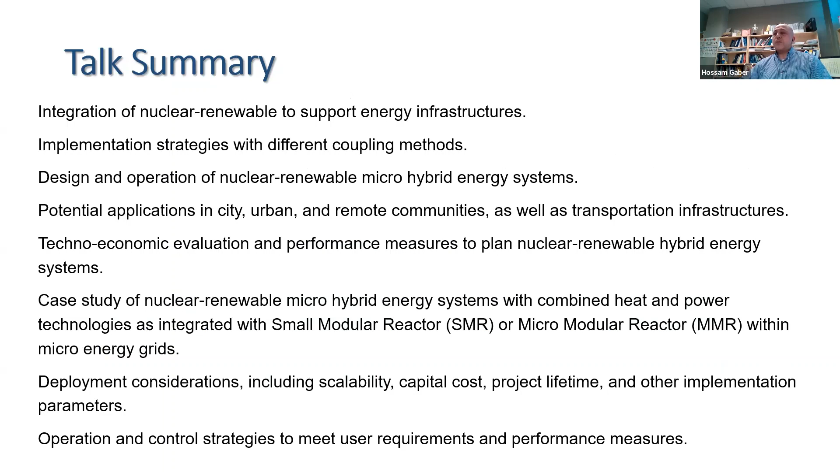At first, before we talk about nuclear renewable, I started this work actually in 2003 around Japan, where I was a professor there at Okayama University, in 2004 actually. At that time, I started looking into what is the problem - why do we need hybrid energy, and why don't we just use one source like a nuclear power plant and that's it?

So what we did at that time is I modeled this area and meshed it with GIS, geographical information system, and captured information from each cell, like number of vehicles, number of persons, number of plants, buildings, cars, and then emissions and energy, and we tried to balance those to be able to calculate what we really need and what is the best way to move forward.

If our demand is increasing and the resources are limited and not meeting the demand, then definitely we need to find solutions. In Japan at the time, biomass was eventually one of the largest, along with hydropower. We have a lot of rivers, and the hydropower is quite large, but also the biomass, where the buildings are built from wood.

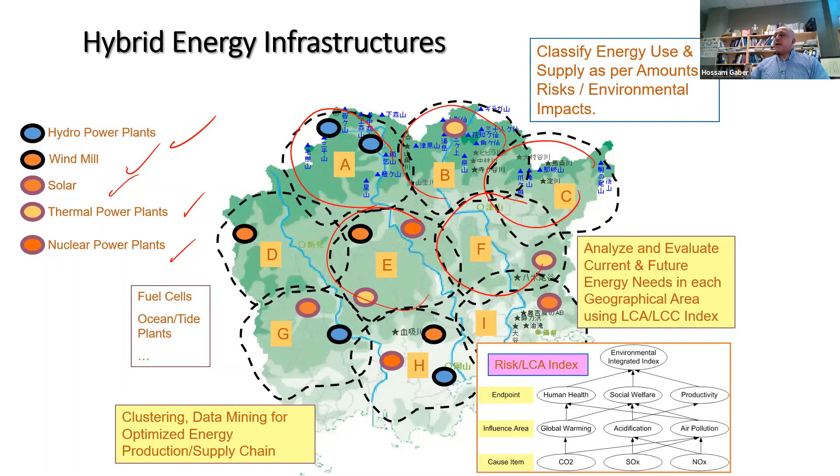So at that time we studied this picture, and I tried to come up with a solution where I try to make it automated. So I generate numbers, thousands, and actually I reached maybe more than 400, 500,000 possible scenarios for different regions. Each scenario means a strategy, different energy technology. Based on that, we try to analyze them and come up with a performance. So that's where we reach the first stage.

Now, the energy modeling part, which is an abstract way, it's not necessarily just thermal or electric or fuel gas, but it's also work, like the thermodynamic law, something that you need to do something, move something, like maybe a motor, engine, generator, turbine, and so on. So you need some usage out of that, which is the work at the end. In addition, we have some other things like light and some other mixture between them.

So at that time, when I was doing that analysis to come up with what is best to move forward, I needed to build these model libraries. The model libraries will allow us to first understand in an abstract manner what are the possible conversions, even some of the things that might not be available.

Like for instance, at that time in 2003 and 2004, there was no clear cut about like fuel cell in terms of advanced technologies, fuel cell, gas-power, or power-gas conversions, and so on. So that's where I started looking into applications. Like now, we don't have a hydrogen barbecue, for instance, or hydrogen boiler, but we do have hydrogen fuel cell. So accordingly, there are things which we can think about.

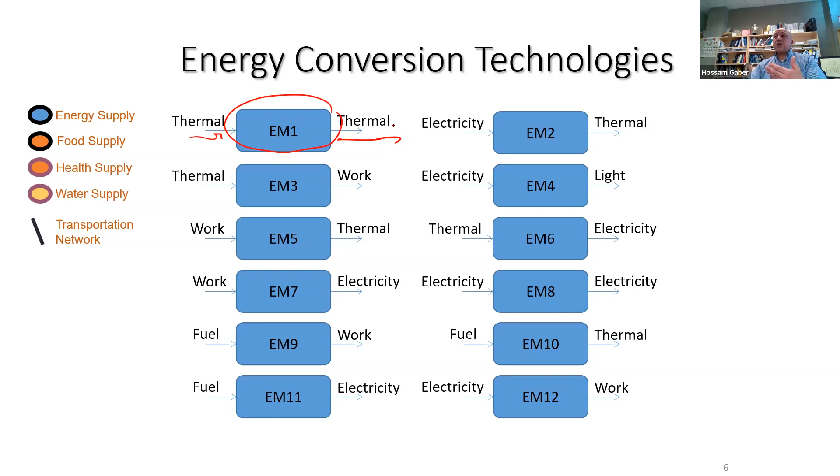Based on those, I embedded that into the model so that I was actually able to generate and evaluate the scenarios to achieve the best possible combinations. At that time, I thought about something very interesting, and I believe I was one of the first people to think about smart energy grids at that time in 2003 and 4.

And that's where I found that it is possible that, for example, if we have a building like in your campus, you have a natural gas pipeline coming in, and you have thermal pipelines and thermal storage and so on. And you have the power, electricity, and you might have network, and some other cables coming to the building. At that time, I thought, what about we think about this cloud, like internet energy cloud, Internet of Energy, or electric cloud, which means I convert everything to electricity and just move electricity across places.

So in this case, instead of extending natural gas pipelines, I just extend power cables. And if I want to get any natural gas or hydrogen, I can generate hydrogen by electrolyzer and fuel cell, for instance. That's where I started looking into different extremes and evaluating them with different scenarios.

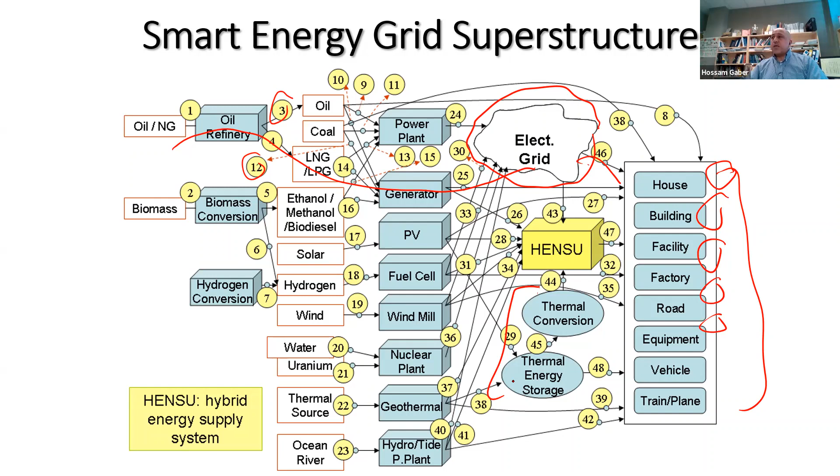After that, when I went to the big picture, I had to go down to the end user, like a building, a campus, a factory, a farm. Based on that, I started looking into the lowest possible, smallest level, which is a micro energy grid.

So we have two-way communication, which is the transfer from the infrastructure, like a water network. We can get water into the building, or we can get water from the building if it is treated water, processed water, or stored water, and so on. Same for electricity, gas, and thermal.

So I included at that time some prediction of gas price, electricity price, and weather forecasting for the thermal. Based on that, we were able to say what the best possible scenarios are between microgrid 1, micro energy grid 1, micro energy grid 2, and the transmission.

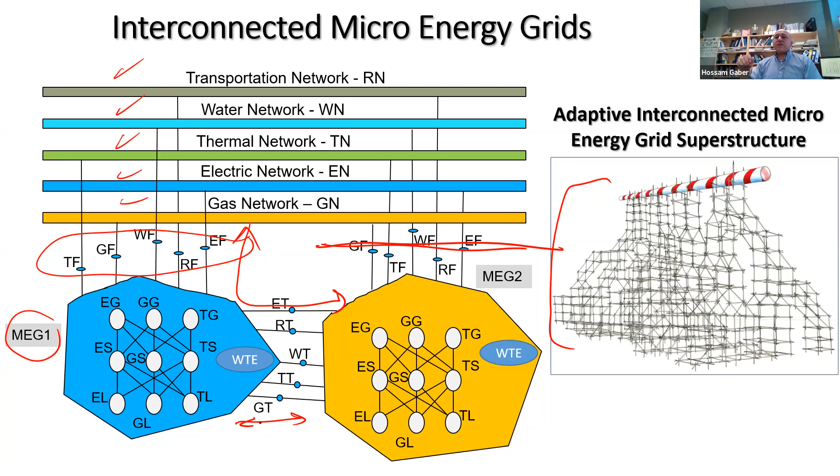One point I want to highlight: the definition of micro energy grid. As we know, people thinking about microgrids always think about AC-DC lines—if we have an AC line and a DC line, that's usually called a microgrid. But in my case, I was talking about a micro energy grid, where I'm talking about hydrogen flow, thermal flow, natural gas flow, water flow, and transportation.

Here, I also included things like waste-to-energy. We get the waste, with gasification and pyrolysis we can generate high-value gas or clean diesel or clean oil, also for industry and transportation. But also we can generate electricity out of the waste. Based on that, we are able to link them with the comprehensive picture.

Now, as we know, this is a comprehensive model that can be implemented in different places. If we implement this in a northern area, it might be different than if we implement it in a southern area where we have more thermal needs. That is where the variations, parameters, and configuration can be adjusted. Same for availability—if we do have natural gas, we include it based on the price prediction and availability.

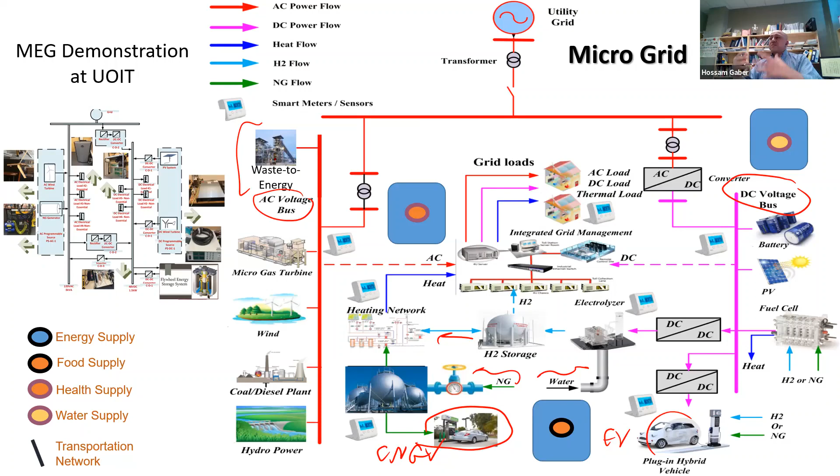And in our house, the heating couldn't work because of the electricity outage. So it was a sort of disaster, but that's where a hybrid system can give us resilient energy systems. The combination between them will lead to the best possible microgrid or energy scenario.

Now, what do we mean by best? So I started quantifying, analyzing, and modeling what we mean by the best hybrid energy system. I'm preparing this before discussing nuclear renewable, because this is very important—when we talk about nuclear renewable, we will talk about the best scenario. So we modeled sociocultural, economical, environmental, reliability, and technical parameters, which gives a comprehensive view.

If you have an energy system and you'd like to say it is good or bad, how good or how bad, you'd like to give it an overall percentage evaluated based on all of those factors, not just cost, reliability, or quality. So that's where I created those parameters to be able to evaluate them.

And I linked the parameters based on the microgrid components, like PV, SMR, wind, generator, and so on. Each of these will have a set of variables—for PV, it's things like height, weight, dimension, capacity, power rate, and so on.

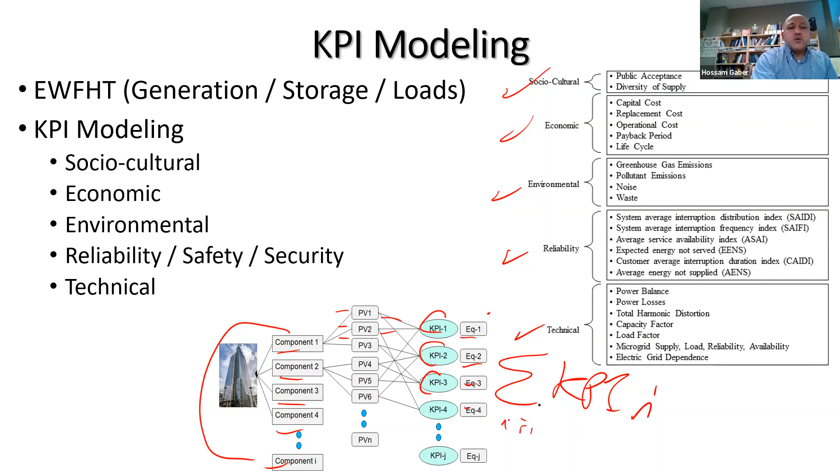Based on that, we group them into KPIs, and overall we put weight on those KPIs. The summation of all KPIs, i, from i equals 1 up to N, for example, allows us to get the overall value of the KPIs.

In addition, we also quantify the risk. The risk—although any industry or energy system is always very clear about this—is the likelihood times the magnitude of consequence, L times C. However, what we're saying is the probability of failure also has to be related to that value.

If I tell you I'm going to install a hybrid micro energy system with SMR, wind, and solar, it's not enough to say how much it will cost and how long it will take. I have to say it will be reliable, that it will not have interruptions for a certain period, which is the probability of failure on demand, related to probabilistic approaches.

That's where we developed this Bayesian belief network to evaluate the cost of losing electricity for one hour. We were able to integrate that, and based on the cost of losing electricity for one hour, that gets reflected in cogeneration, resiliency, and the value of nuclear renewable.

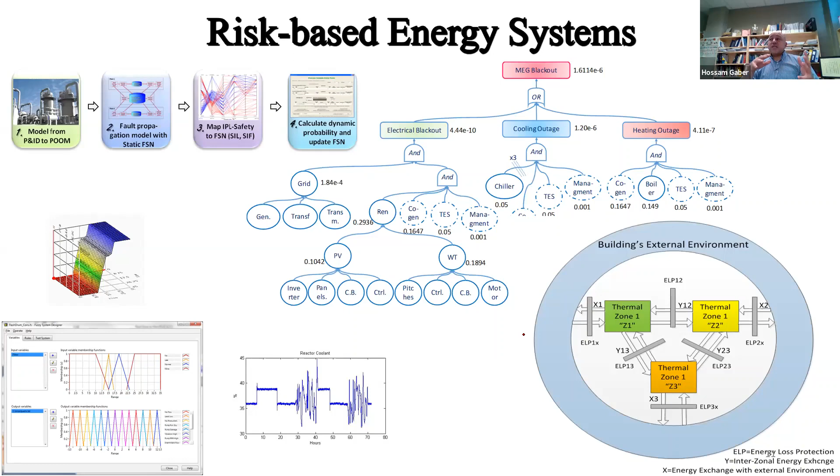That's what led us to IPL, independent protection layers, and PFD, probability of failure on demand. This is a detailed concept, but essentially, if you need resilient energy systems, the probability of failure should be very low, which means you need to add more additional protection layers.

In terms of safety, a protection layer is an alarm, shutdown system, and maybe redundancy. But in terms of resiliency, the protection layer, or resiliency layer, will be cogeneration and storage. So if you have more storage, even if you have a power outage, you can use the storage for a certain time.

So I try to link the resiliency with the risk, and they created those concepts of IPL and the independent resiliency layers, and I captured that, and that was also published and analyzed.

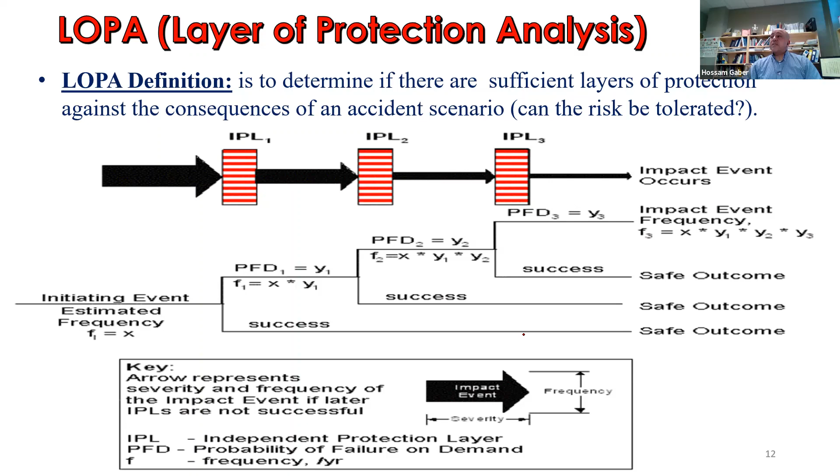Now, based on that, we are able to talk about how to introduce nuclear renewable as a motivation here. So we would like to introduce nuclear for a number of reasons.

It is sustained, sustainable, clean, and reliable. Especially SMR - small modular reactor, or MMR, micro modular reactor - they are expected to be sustained and stable. There's no additional burden of operation, changing fuel, and so on, and no generated local waste in the region.

However, there is some waste that could be generated for maintenance and inspection and so on. However, it is minimum. Also, because it is a stable energy source, it can cover the base load. But for the availability of local resources and RES, which is renewable energy sources, we are able to integrate and get the best out of both.

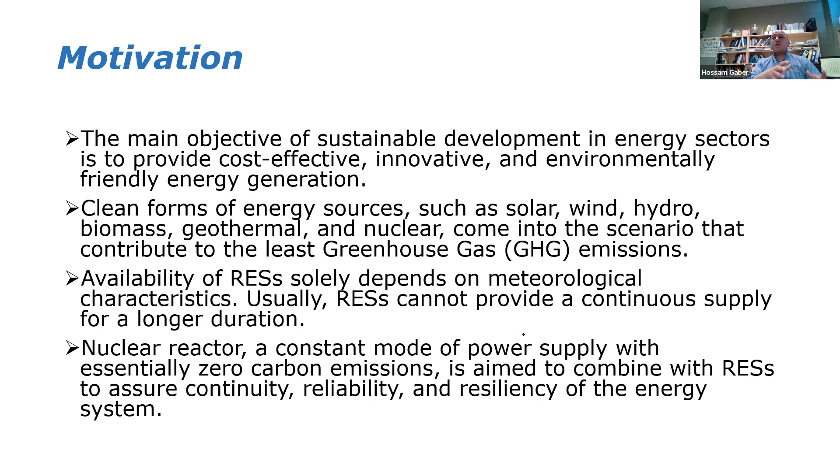The energy can have availability most of the time, and also resiliency. For any reason, if the SMR is not available due to maintenance, inspection, or interruption, or due to licensing - and I will show a couple of examples about marine, where nuclear cannot enter certain territory because of legislation or policy that does not allow nuclear in their territory - then we can use renewable to compensate and balance the energy supply.

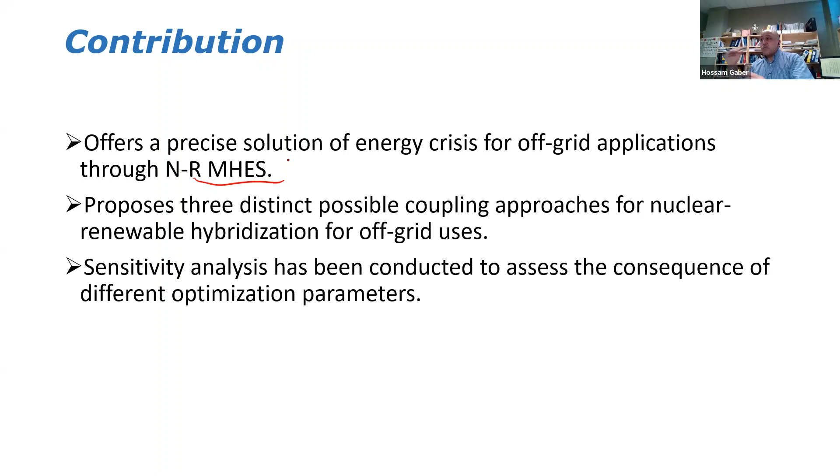So what we are doing here is, number one, nuclear renewable hybrid energy system. Number two, nuclear renewable micro hybrid energy system, which is at the level of a microgrid in small scale. So that's what we have been talking about.

Now, in order to raise this point, we have to ask ourselves a number of questions. Number one is strategy. We understand that the nuclear power plant primarily generates thermal, and based on the thermal, we are actually generating electricity.

That is a generator, turbine generator. So eventually what we get out of the nuclear reactor is thermal, but the thermal can be translated into electricity. So the first thing that comes to mind is the coupling. Now, why we need to study the coupling is because the nature of nuclear renewable might vary.

Like fuel cell has certain input, which is electric, and then from the electric we get hydrogen, and from the hydrogen we get electricity. So it's like power-to-gas-to-power.

Now, for flywheel, for instance, as energy storage, we supply a little bit of electricity, we store it, and then we generate electricity at a certain later time, which is good for a number of reasons - for high inertia, but also as energy storage to balance certain peaks, to shift the peaks or to balance the peaks.

Also, we have a number of typical technologies like PV. So I can use the pointer. Here we have the PV, and here is the hydropower plant. Here is the wind. Here is some load, which we call electric load or thermal load. And here is electric energy storage, like a battery.

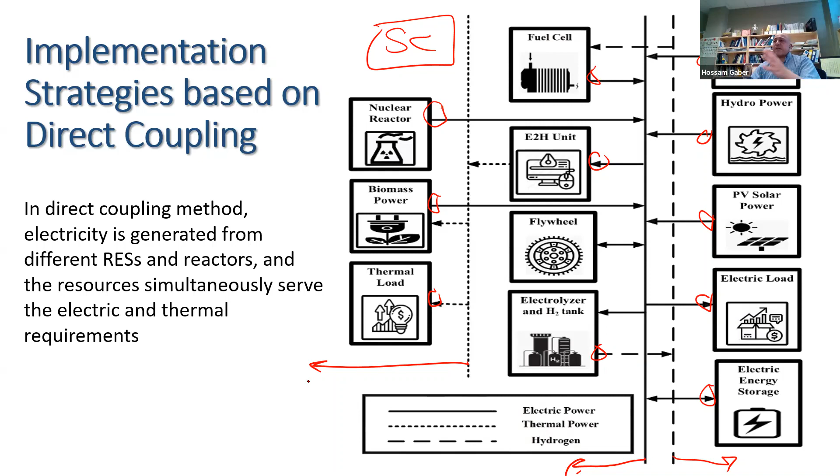So that's what we call direct coupling. We are directly coupling the renewable energy, electricity generated from different resources, and directly linking it to the load.

And the thermal, we can get thermal waste from nuclear in a number of ways, of course, from the condenser area, from the tower, but also we can get it from the reactor itself in a number of ways. So we have those aspects of getting multiple products from the nuclear power.

And again, who decides what is the best? You have to come back to the same KPI. So in order to decide what strategy is good and what is bad, you need to define, first of all, what do you need? Because simply you can actually have here petrochemical processing, so you can have the electricity or thermal to produce petrochemical, electrical, or chemical product.

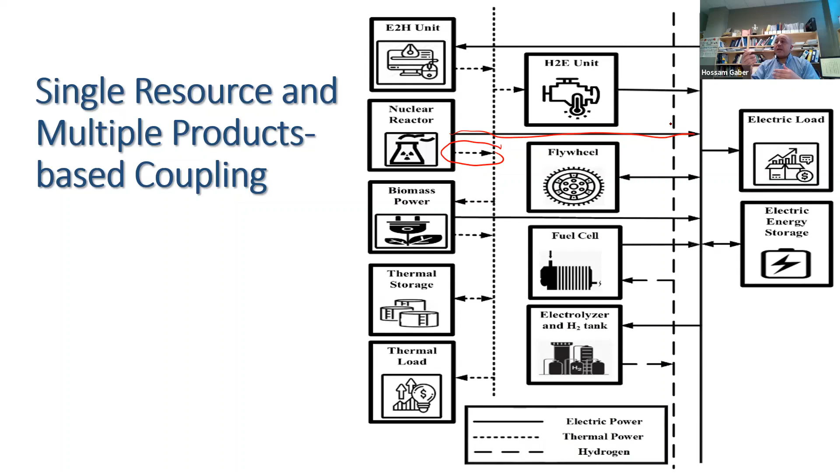Even hydrogen itself, the hydrogen production, you can produce that by thermal or by electricity. As of now, we are producing hydrogen by electricity, but there are some other methods like copper chloride cycles with different cycles where you can actually generate hydrogen by a thermochemical process.

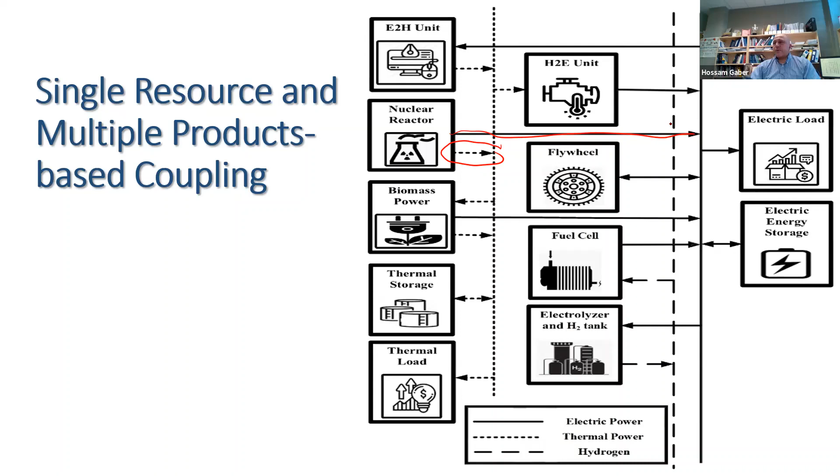Now we can have something more complicated: multiple resources and multiple products. As you see here, we can have different resources coming with multiple products coming out from the nuclear power plant. So we can see here that we are able to have a thermal storage, thermal load on the thermal side with biomass power plant and nuclear reactor thermal, and also E to H, which is electricity to heat.

So that's one side. And then we have also the other side, which is H to E, where you can get the thermal and generate electricity here, and that goes to the line here, to the electric load, and also can go to the electric storage.

So imagine that you are able to manage all this picture, in and out, based on pricing—price of electricity, price of gas, maybe the levelized cost of all those resources—but also the weather prediction and the load profile of thermal and electric load. So we are able to optimize this picture based on our needs and our criteria, I would say.

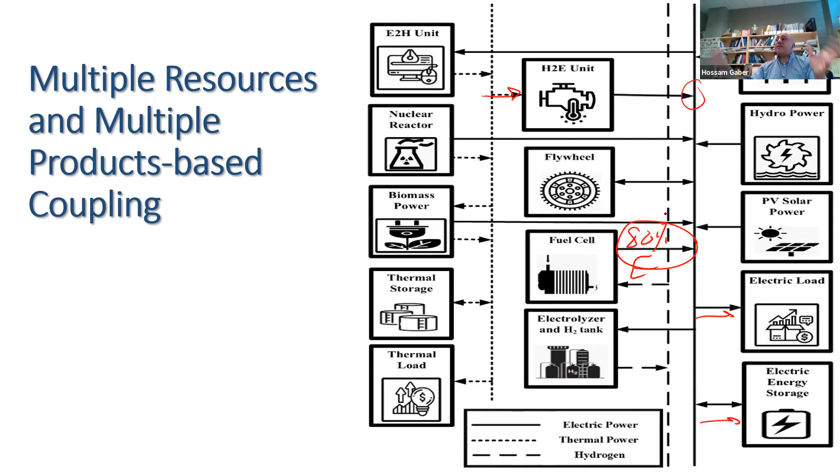Of course, there are other parameters, like regulations. For example, I could say I need 80% of electricity to be generated from the fuel cell. This is a parameter we can actually dictate, specifying what percentage of electricity comes from each source. Maybe 5% from E to H or H to E, and 10% from SMR, and so on. Each generation capacity can be parameterized and configured based on the optimization criteria and the control structure that executes it.

Now how to do that? It's a small picture, but I'll explain simply. We'd first like to see the resources and load availability, get the profile, and then determine whether we have adequacy to sustain the load, or a need to start utilizing any of these other sources.

So imagine we are putting parameters here, this is A, this is B, and so on. Each of these is parameterized and controlled. Parameterized means either on or off, yes or no, and number two is how much amount, with respect to time.

We can apply this algorithm with a 1 hour ahead prediction, or a 1 day ahead prediction, with optimization to tell us the size of the PV, the size of the electric storage, the size of the thermal load, the size of the flywheel, and the size and capacity of each unit, like E to H, H to E, and the fuel cell.

If we are also considering SMR as one of the parameterized elements, we can configure what type of SMR is needed and its size. So we can define the number of parameters to consider, along with the control strategy.

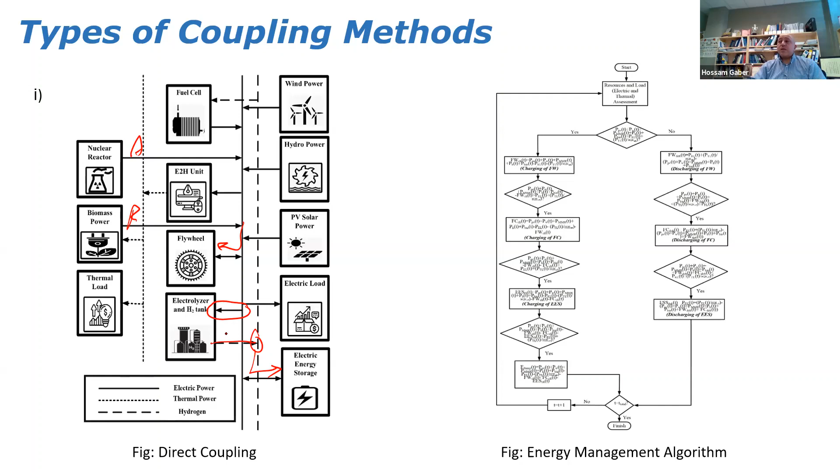Similarly, when we have a single source but multiple products, like thermal, electricity, and hydrogen, we can combine the picture. This complicates things, because now we can ask: do we need to store more thermal or more electricity?

I didn't talk yet about units like CHP, combined heat and power, where natural gas comes in and there are two outputs.

One is thermal and one is electricity, so we're able to generate thermal and electricity as output of the CHP. By this way, we are able to have more high coupling mechanisms between the gas and power.

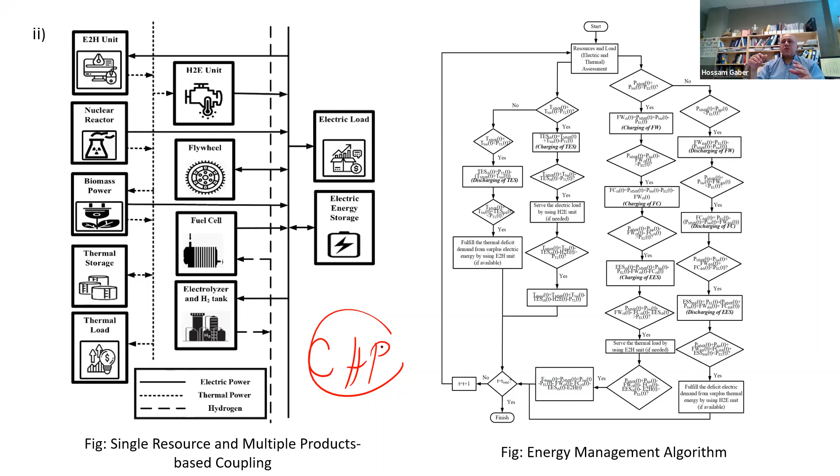This is a template algorithm, and we tested with a number of scenarios to achieve the best possible optimization criteria for that scenario. As you see here, it is not only that we are optimizing the sizing, but also optimizing the control strategy, whether we fully store the electric battery or electric energy storage, or we store in the flywheel, or we store in the thermal, and how much.

One more thing I'd like to say, this is two-way. For electricity, when electricity goes in, it has a price of $1. When electricity goes out, that is actually $2, which means when you store one kilowatt in the energy storage, it goes with a price. When it goes out, it goes with another price. Who will decide the price?

That is energy, transactive energy, or energy accounting, or economy, where we can actually define the value. Sometimes in Canada we have the OPA or IESO, where they estimate the price and dictate it among utility companies to regulate the price. So what we're saying is that the price going into the energy storage is typically different because of the timeline.

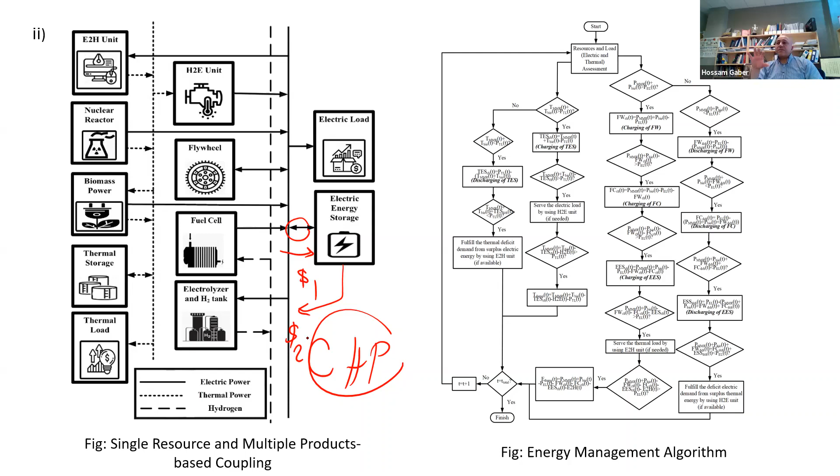That means if $2 is more than, should be more than $1, we are doing well, because now we are actually getting profit from the energy storage, and that's how it's calculated as ROI and the installation, but also how this can compensate the picture of a nuclear power plant as a baseline.

I will show a couple of pictures. The same way, this is again another algorithm, multiple sources, multiple products, and a couple of things now for the parameters, which we started using in the optimization.

For the nuclear reactor, we have certain parameters, for example the size, the lifetime - we consider 40, it could be 60, and that's parameterized. We can change the parameter and rerun the optimization. We are considering an MMR, a micro modular reactor, and here we have the capacity, the total capital cost, the first unit deployment cost, and the rate of cost reduction, and a number of installations.

Based on that, we are actually using some parameterized values, like fixed operation and maintenance cost - $350 per kilowatt electricity - and fuel cost, $10 per megawatt hour, and so on. So we have parameterized values which we got from some references, to be realistic.

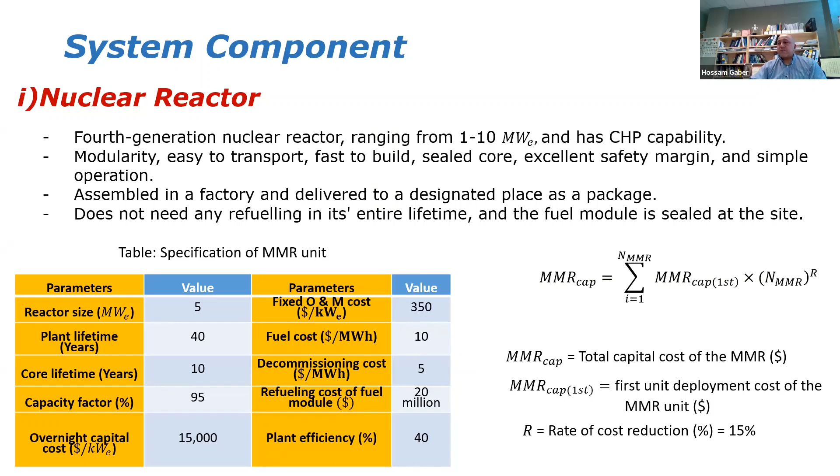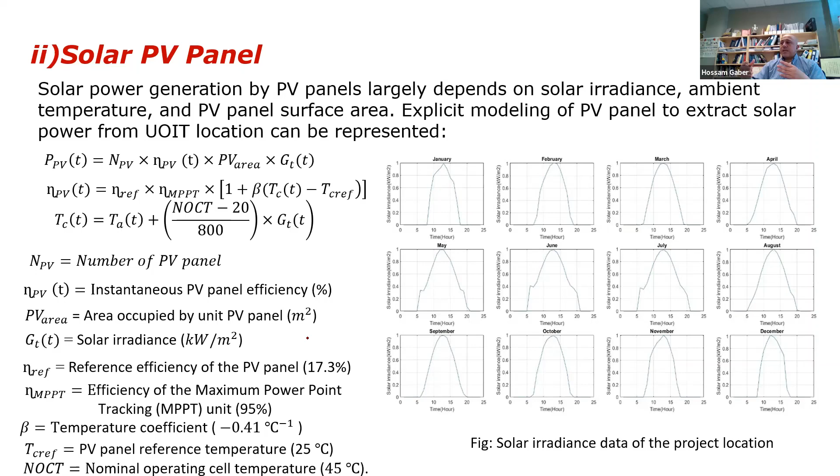Based on the parameters, we started looking into each component. We took the PV, and our target is to get the net present cost, which is a way to standardize and unify the cost at a certain point. For the PV, we consider the number of panels, the instantaneous PV efficiency, the area, and the solar irradiance in kilowatt per meter square, and so on. Based on those parameters we modeled that from January up to December, and we're able to get irradiance data as model parameters, or model input, to use for our simulation model.

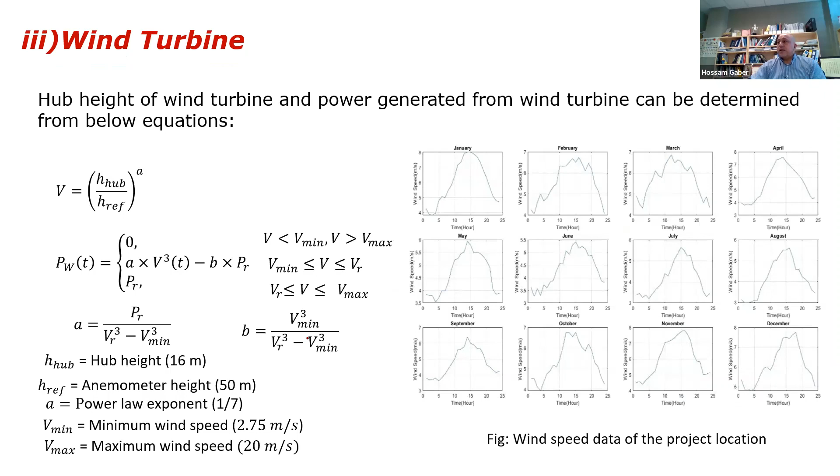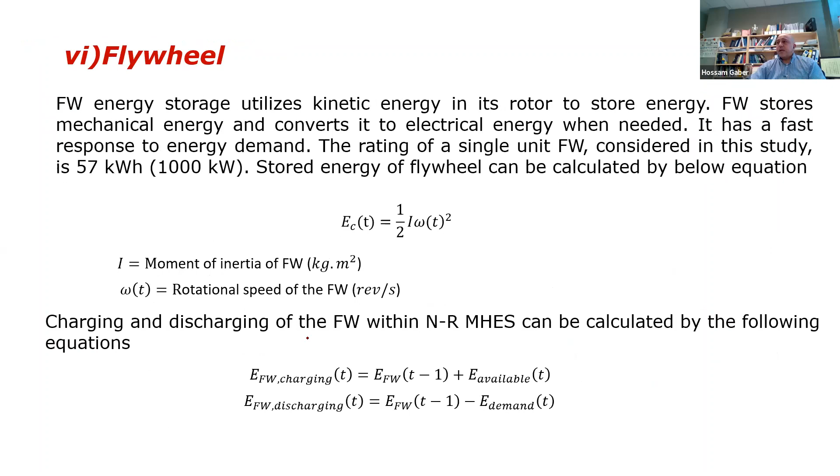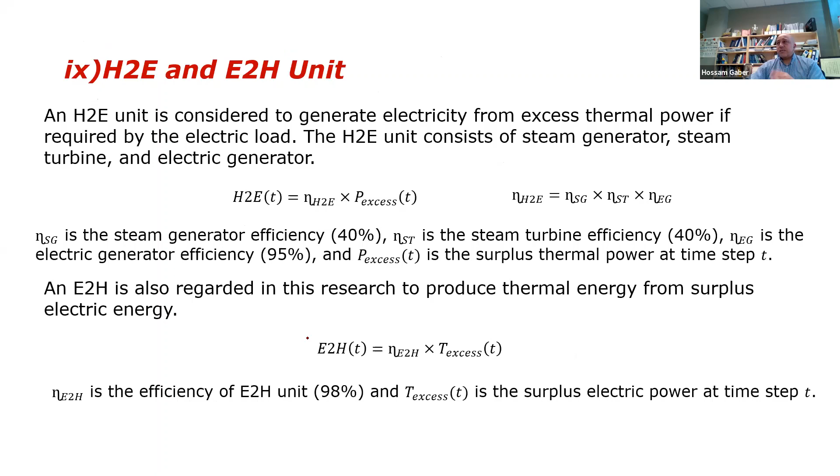The same for hydro, we estimate it, and based on that we get the biogas generator and the parameters for the flywheel, and those are the different components - fuel cell, electrolyzer, and the hydrogen tank. We got the model, and we got the thermal, electric, and thermal storage - again the model - and the H2E and E2H, we got the model. Based on that, we define certain parameters that we are able to change as we want.

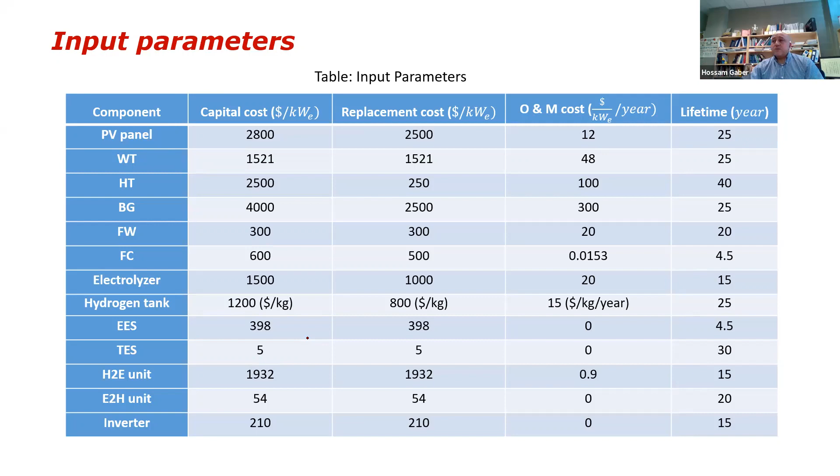So for example, you can change if we go to a certain region or the capital cost is different, we can change it, and automatically the system will recalculate and optimize. So we got that for the wind turbine, the PV, the flywheel, the fuel cell, biogas, and so on. Hydro turbine, and so on.

Electrolyzer, tank, electric storage, thermal storage, and so on. So based on that, we started looking into profile. What do we need to achieve? What is the target? What is the demand? What is the load that we need to meet? So we captured that load profile for electric load profile and thermal load profile.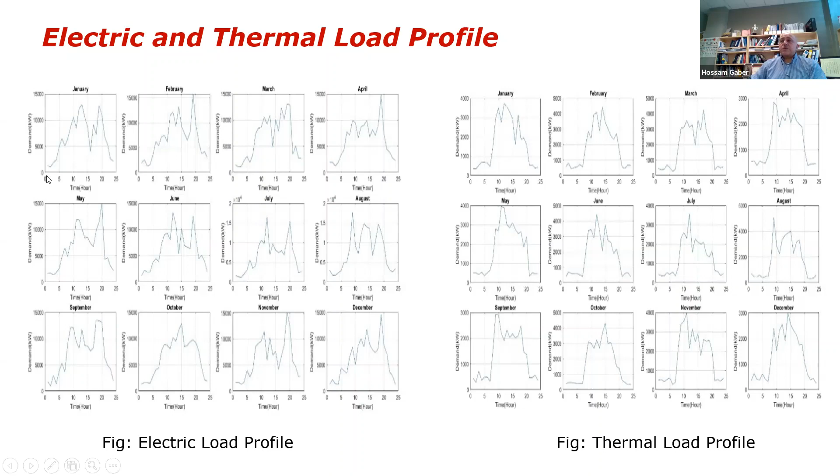And now our target is to program, model, and optimize our configuration for nuclear renewable to meet that profile. So we got a certain profile for electric and thermal from January till December, and we captured them in a certain time frame. So if you see here, it's 24 hours, from 0 to 24. And based on that model, we said, okay, we need to optimize.

What do we need to optimize? So we need to capture everything, we bring it back to the net present cost. So even if you have efficiency, reliability, energy served or energy not served, and so on, all those performance parameters, we bring them back to equivalent net present cost. And the idea here is to reduce the net present cost.

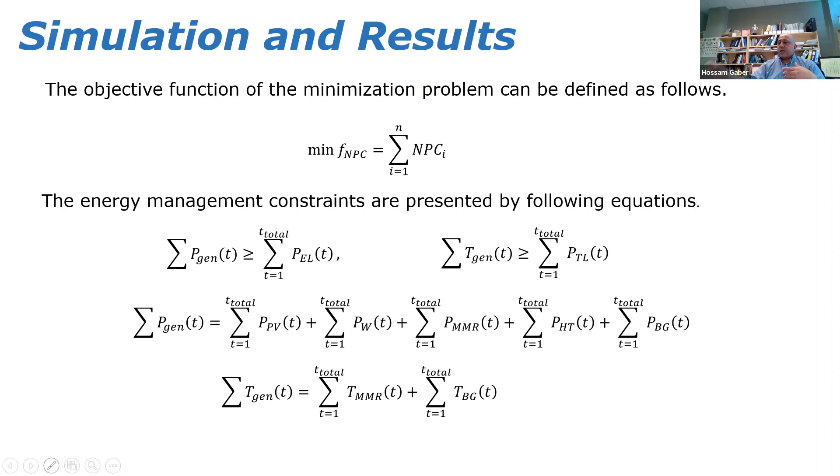So we capture the generation, the temperature, the thermal, the electric, and all those power, thermal, and electric parameters. We capture all of them. And based on that, we try to put some constraints, because we can either put them as optimization function, as objective function, or we put them as constraints.

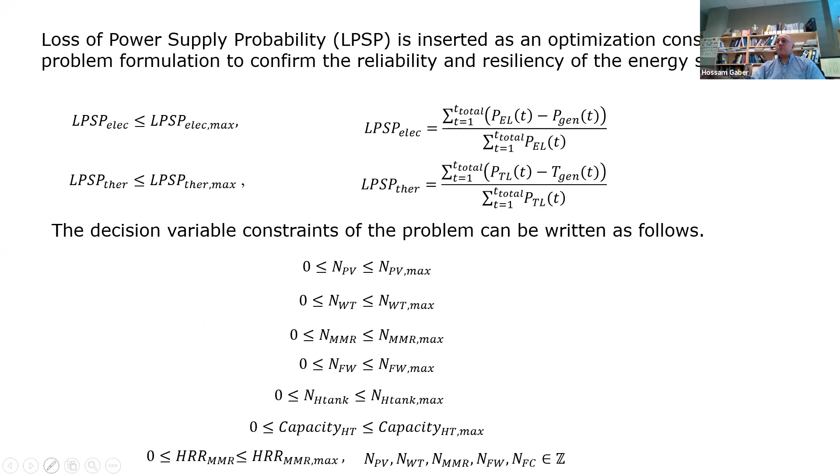Some of the decision making, we rather prefer to put them as constraints because of the fact that we don't know exactly what is the best way, but we can swap them between either constraints or objective function. So we actually defined a list of objective functions, and based on that, we were able to make the simulation runs using different optimization algorithms, with different runs and different parameters.

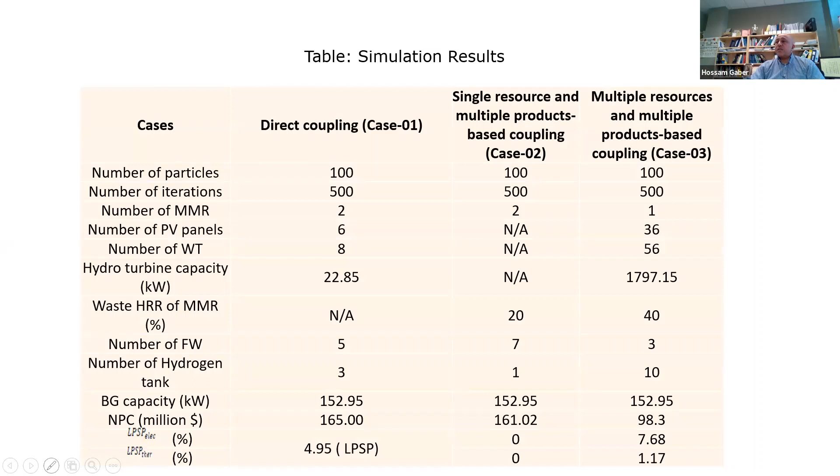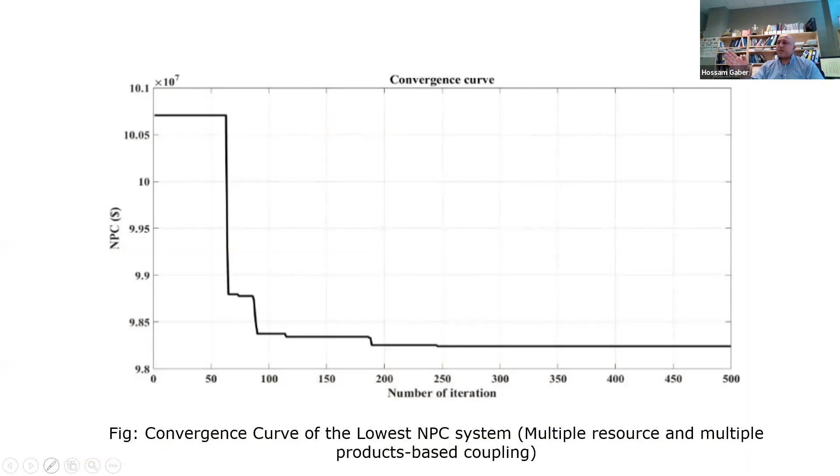We use them to actually do the simulation. So here we have a convergence so that we are trying to get the net present cost to achieve, like, a number of iterations. And each iteration we reach up to maybe 200, 190, or something, we reach the convergence. And that is where we believe this is the best possible combination between them.

And a couple of things we would like to achieve here is that we keep changing the wind and the solar and the sizes so that we can achieve the smallest possible net present cost of the hybrid system.

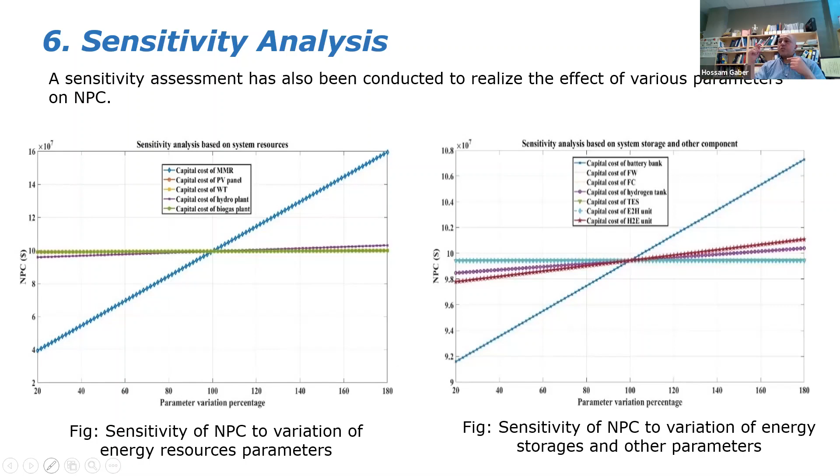And that will allow us to know which parameter is more sensitive, and that is where we use it also for design and validation. So after doing all those analyses, we were able to do some combinations between different parameters, and based on the input we change, we get the output. We were also able to apply sensitivity analysis, showing that if we change plus minus 5%, we can get an idea of how much improvement in the net present cost.

And that will allow us to use it for considering some design issues. Like, if the capital cost of the battery is crucial, then we can focus more on the capital cost of the battery, or of course SMR or MMR or some other parameters. So that allowed us to see what could be the possible impact, also on the profitable and reliable hybrid energy system.

As a conclusion, we compared a number of case studies, which is either nuclear alone, renewable alone, or nuclear renewable. We have actually 3 cases, and based on the 3 cases, we achieved that the most effective one is the nuclear renewable. Based on this configuration, after optimization and with sensitivity analysis, we came to the conclusion that for the provided load profile, the nuclear renewable hybrid energy system is the most effective one in terms of net present cost, with considerations of technical aspects of each of these technologies.

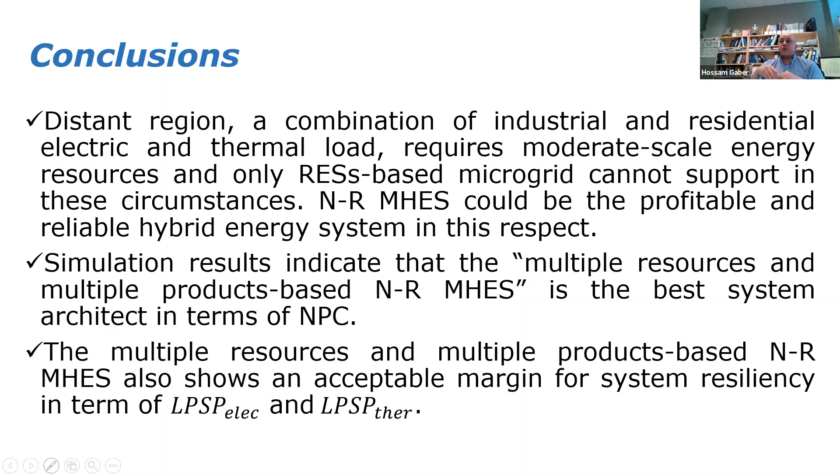Now, I would like to spend a couple of points about applications.

We do have nuclear power plant outages happen a number of times, including Fukushima. So that motivated us to think about developing a microgrid with SMR or MMR that will be integrated with the nuclear power plant. So at a certain point when they have an outage, it is able to cover the needs for the safety system, class 1 to 3, and also be able to sustain operation for emergency. And that will allow, of course, a safer shutdown and safer resilient operation during emergencies and abnormal conditions.

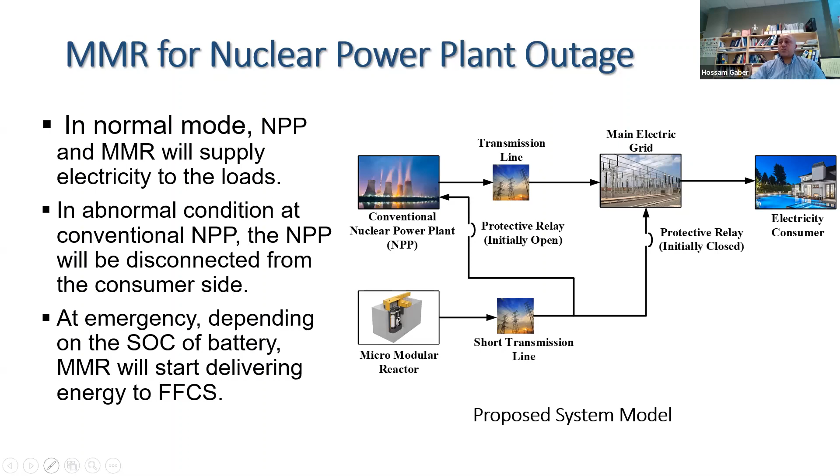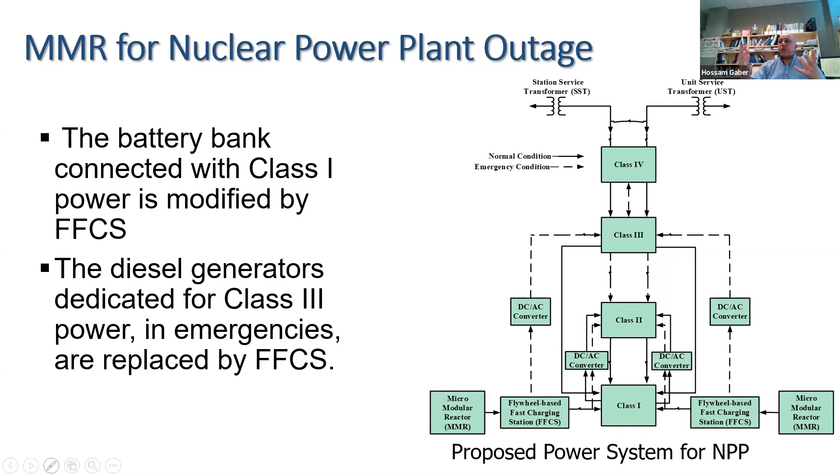So we start looking into that. That's why I say class 1, 2, 3, 4. We thought about first implementing that microgrid with fast charging with flywheel into class 1. That's where your system should be all the time up and running, cannot be down a single minute because of the safety requirements. Class 2 might be 1 hour, class 3 maybe 1 day, class 4 maybe more, and so on. So we were able to design different applications for that.

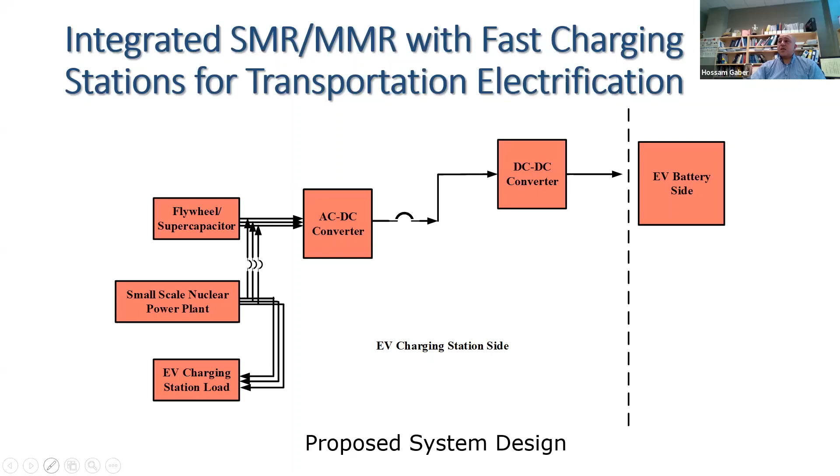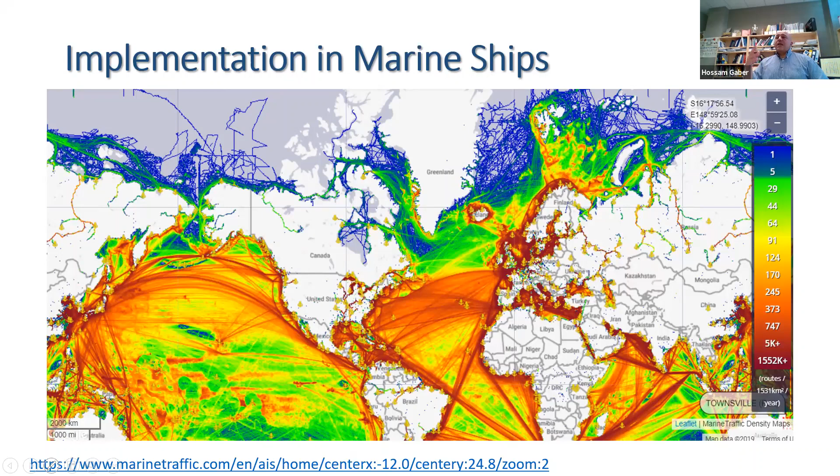Another point we have been using is charging for marine. So we went through the marine application. We understand that if a ship can go 1 kilometer, it costs less greenhouse gas and less fuel compared with a car or a truck. So if you would like to make transportation through the marine, through ships or through the ocean, that would be cheaper and also less greenhouse gas emission, because moving 1 kilometer or 100 kilometers by marine costs less gas and less greenhouse gas emission. So that's where we went through that exercise to analyze the marine ship.

And we developed that, and that's where we published a couple of works. I will show it in the references. I didn't put much here because the papers were under review, but now one paper is accepted as of last week, and the other one received a couple of minor comments to review. So the idea here is really to implement the system into marine ships.

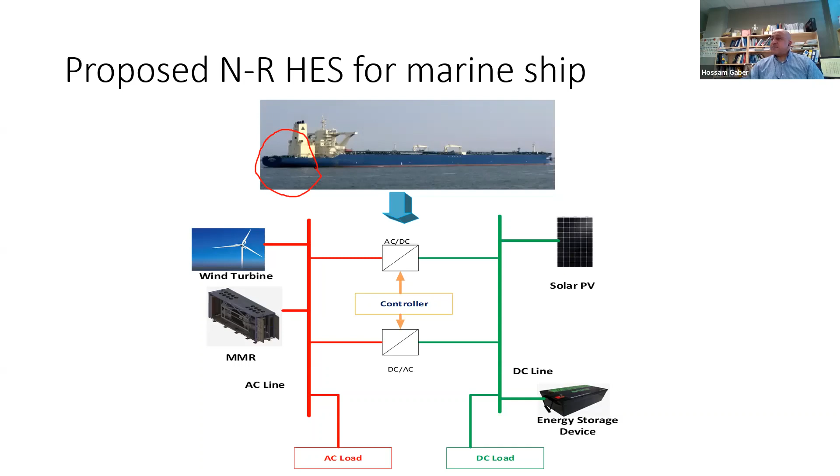A couple of final things: for monitoring nuclear-renewable integration deployment, we do need data centers and data analytics. So we did some work with data analytics, because if you go to any utility company, you will find they are only monitoring energy in/out, power in/out. But what we are offering here, we are trying to emphasize efficiency, conservation, safety, and reliability.

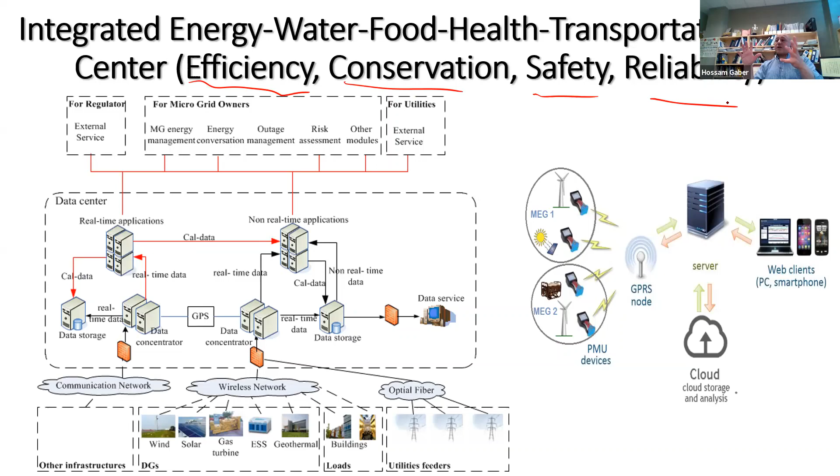So if you have a pump, from an efficiency point of view, you look at the output power for pushing, how many hours it's working, the efficiency for differential pressure, and the input power. That's efficiency. But conservation is another factor we consider for each component, which is how much energy you are actually saving. Safety is the probability of not failing, or freedom from unacceptable risk, and reliability is also a probability of not failing. Accordingly, we are capturing all those factors.

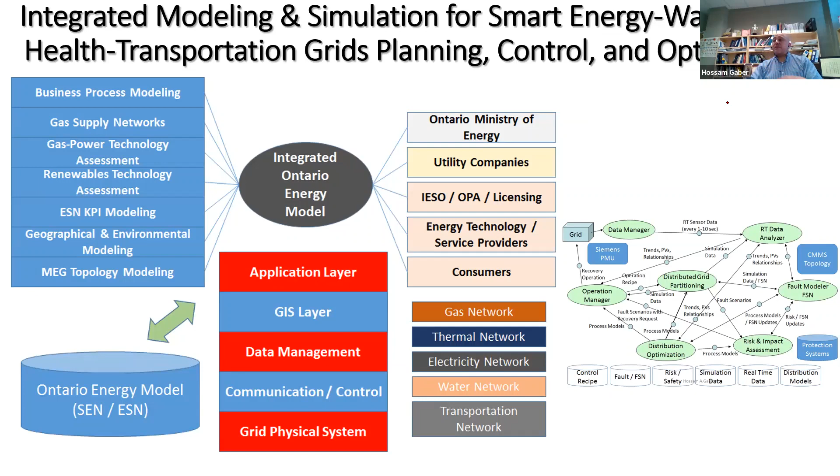And for deployment, in Canada, if we would like to deploy those in different regions, including remote areas in northern regions, we are able to capture that data and implement a sort of infrastructure to implement and monitor those.

And finally, as I mentioned, this can be implemented in different aspects: energy, water, transportation, food, especially now with different challenges. Health is related to food, related to energy, related to water. So I started looking into this picture as hybrid energy systems.

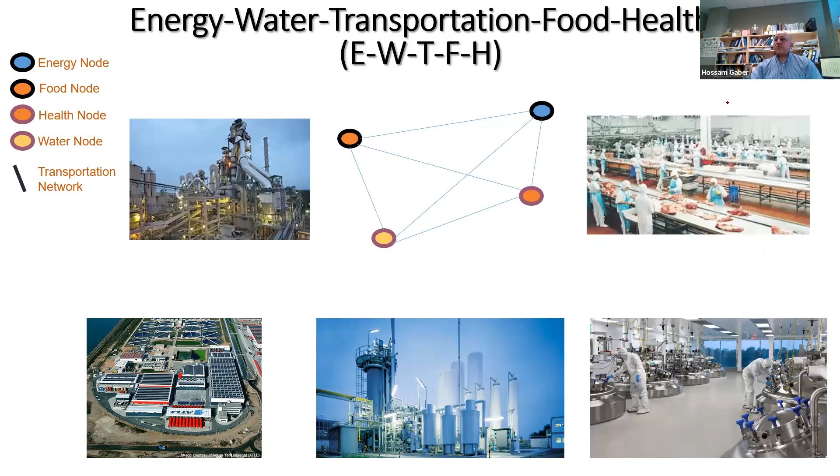Finally, I'm just watching the time to stay on schedule. Most of my talk you can see in my book published with Elsevier, Smart Energy Grid Engineering. This is a link, and you are most welcome to view this book. I also recently published another book called Energy Conservation: Residential, Commercial, and Industrial Facilities, with Wiley and IEEE Press.

I have a couple of conferences like SMC. I was also chairing a couple, I was general chair, and we had some sessions about smart energy as well. We also have SEGE, the Smart Energy Grid Engineering Conference, held every year in August. This year too, so you are most welcome to submit papers to our conference. Of course, this year is still virtual. Hopefully next year will be physical.

I'm also involved with CEST, I would say I'm the founder of CEST, which is an annual conference. Last year, 2020, it was in Turkey. This year, I think in Finland. The previous year was in Portugal, and the year before that was in Spain.